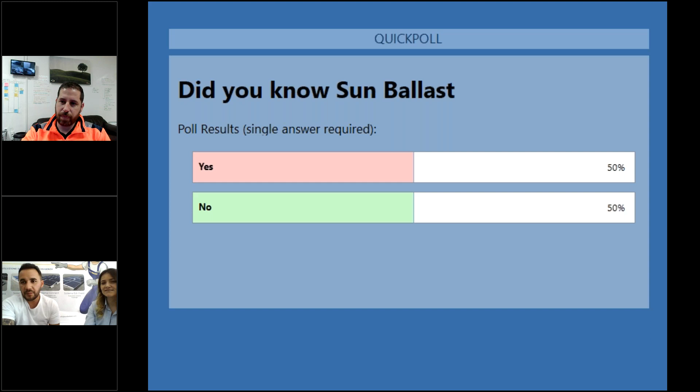That will be our second question, which we would like to share with you as well. What does your company deal with? Installation, design, engineering, distribution, EPC, or other?

Great. So now it's time to start with the presentation that we have done for you guys. For those of you who haven't seen a webinar from Ballast before, me and Alona, we've done several with a lot of distributors from all around Europe. And the same we'll do with Mr. Spiros here, which is a short presentation of our company. What do we do? What is our mission? Our vision, and then Mr. Spiros will say a few words as well regarding his company, and then we'll talk regarding our distribution part, right? So how it's been affected all these years.

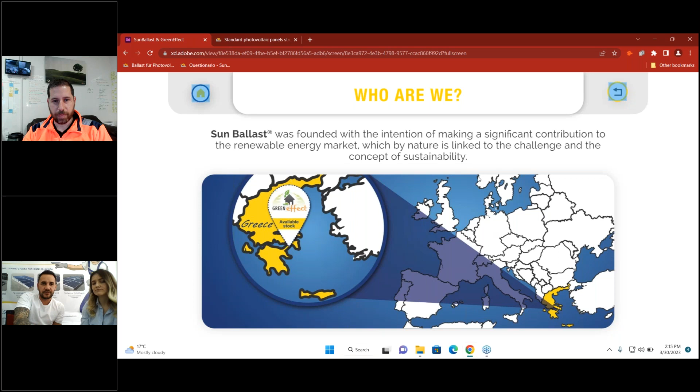Yeah, before we start on that, I'd like to ask a question to the candidates. So, what is the problem that they usually face during the design or installation of a system? There might be common problems, right? So some of them we gathered together, and we're gonna show it to you guys. If there is any other obstacle, any other issue that you had during the installation phase, you can write it in the chat and we will answer.

So, it's obstacles on the roof, small spaces, limited spaces, bad orientation of the building, high wind presence, and load limits on the roof. Yep. Some of them. So if there are others that we didn't mention, feel free to write them in the chat and we will answer you.

All right. It is weird because for a country like Greece, we had this option of high wind presence, right? So far nobody is mentioning it, and we've seen that a lot of installations that have been done in Greece are in areas which are very affected by wind. And Spiros, you can confirm that some areas are very heavy with winds, right? Yes. We have to wait to see what the guys will vote, I guess.

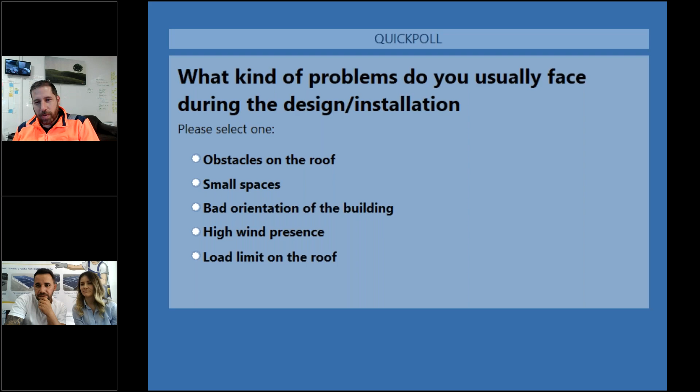Correct. But all these are issues for Greece. We have flat roofs. We don't have tile roofs. Our spaces are small. Most of the houses are one next to another in a very condensed area. There's no space, exactly. The orientation of the buildings is not correct. Of course, here in Greece, there is a lack of proper planning in the municipalities where people build the houses.

So there's no exact south. It's really rare to find a house or a rooftop that is facing directly south. Yeah. Wind in the majority of Greece is an issue, especially on islands, especially on the coastline. And that's where you guys and us go in to identify the areas that need attention with extra ballasts, with specialized engineers, and there's also a program that helps us calculate the ballasts for the roof in high wind pressure.

Correct. So these were the results that we had from the answers from the attendees. So 50% is small spaces, which is something very good actually with the material that Spiros has in his warehouse. I know that he already has one of our systems which is used for small spaces, right? So you know the problems that they face mostly. We can direct the presentation of the solution in that sense as well. Correct. So I think we're good to go.

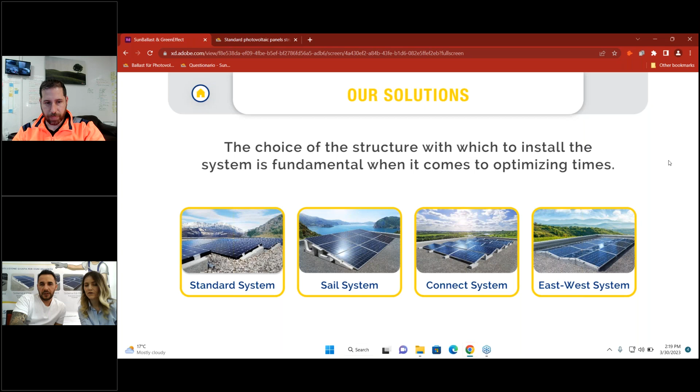To our solutions, and we can see all of them by advantages and the problems that they address. Correct. So SunBallast is divided into 4 systems, right? We have 4 main systems that we produce in several production sites in Italy. These are our standard system, our sail system, connect system, and East-West system. I'll start with the problem of small spaces, being the biggest issue in Greece. So let's go to the sail system.

So 50% of the attendees chose small space, and that is one of the issues that you might find in residential projects, right? In small houses, when they have an area like a garage or a really tiny area next to the house. So for that we have a solution, which is our sail system. Yes, sure. And we will see why that system is chosen by our customers, right?

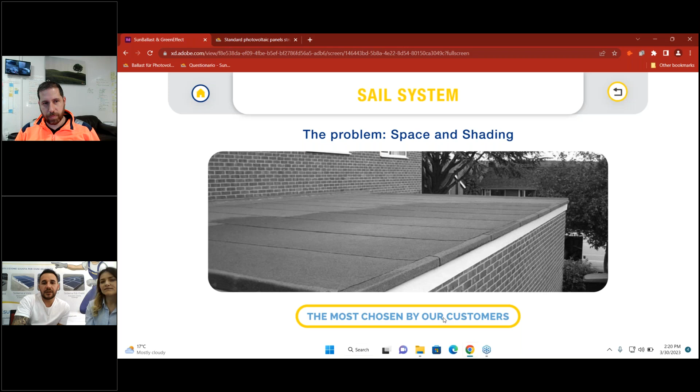In my experience in Ballast, I've seen not just small spaces, but cases when even the parapet is too high. Correct. So the surrounding wall on the roof is so high that you have to avoid shading. This system solves that issue as well. So both problems are solved by this system. That's why Spiros chose this system, being the problem that they face mostly.

So we have 2 solutions for this system. Right, 2 inclinations: 5 degree and 11 degree. 5 degree goes up to 6 rows and 11 degree goes up to 3 rows. Correct. As you can see on the screen, we have below 2 videos of installation that show how the installation is done with the system. Pretty much it's very simple, right? As we mentioned at the beginning, it's only a few steps to install this. So if you like, you could watch.

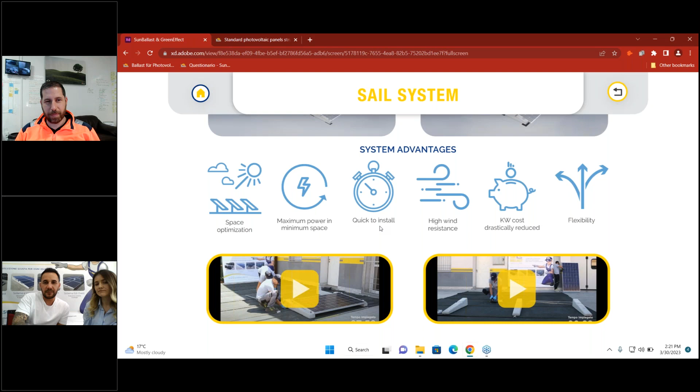Of course, these videos you can find on our website. You can find them through our social channels as well, and you could see them after the webinar. We don't want to take your time to show the videos again, but pretty much it's simple. So we'll talk a bit more about the advantages of this system.

As Ilona mentioned, they come available with 2 inclinations, 11 degrees and 5 degrees, right? What are the advantages of this system? Space optimization, right? Which is something that clients ask for most. They say, I have this small space, but I want a lot of production. Perfect. How can you do it in this case? You have to use this system because it's the only way that you can put the modules without leaving space in between. Correct. And with small space, you put more power on it. So maximum power and minimum space.

As we discussed, this system is very quick and very easy to install, right? Just a few steps to finish your installation. High wind resistance, of course: they are ballasted, they are concrete, so they have their own weight. And here I have to mention that not all the ballasts have the same weight. Each inclination has a different weight. We start from 16 kilograms, our lightest ballast, and we go up to 70 kilograms, our heaviest ballast. So they come in 40 types of ballast, different shapes, different systems, and you can choose according to your inclination the one you want to use.

And of course, they have high wind resistance, as you mentioned, and the kilowatt cost is drastically reduced. Of course, that will make a big impact for the client. Everyone will check the economical side, right? So whenever you want to install 20 kilowatts, and you can do that with the sail system with less ballast, why not? Yeah. Of course, and the flexibility.

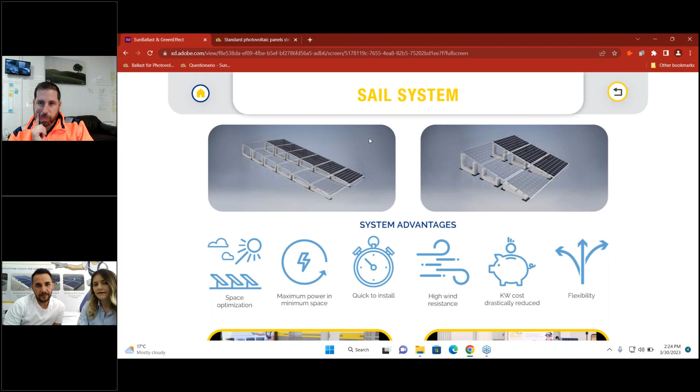Yeah, and I wanted to share something for all those that come for the first time to our website: for each system, you can find the technical data sheet. Correct. For example, here, I want to find 5 degree sail. So here, on the page of the system, or the ballast itself, you can find the technical data sheet. Just download it, one click. All right. We will open it here. So we can see all the dimensions, the width, everything. How it can be installed in horizontal, vertical. It's everything present there.

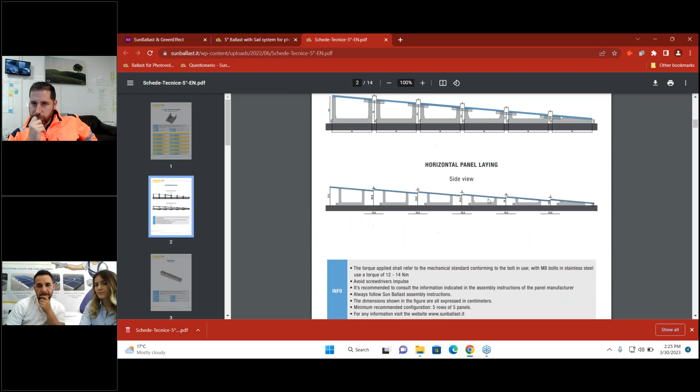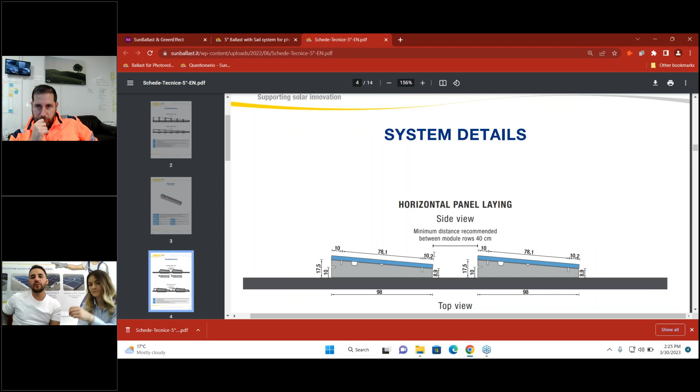Even the distance from module to module, of course, you can do that. It will show you the distance that is required from module to module in order to avoid the shading problem, right? So this system is good to use as a whole one, as Sails, and you can use it as a standard one, single rows, as well. Yeah, that's regarding this.

One question for you: how did you find it when you did an installation with the Sail system for the first time? When we first installed, I think it was like a year and a half or 2 years ago, I don't remember. Initially, you open the boxes and you're like, okay, what are we going to find here? What's the story? But believe me, it's way easier than you even imagine. All the importance lies in the design, in the initial calculation, and the installation, especially for small projects, let's say 5 to 10 kilowatt peak, is really easy. It's basic mathematical calculations. You can finish the installation in a couple of hours. Correct.

This is one of the questions that always comes from somebody who is new, right? Who never installed ballast before, and he's like, okay, this is going to be difficult, even though he might be an engineer or a good installer. At first impact, he thinks he will probably have some difficulties. But when they have it in front of them and try to use it, okay, this is a piece of cake. I can do that very easily, right? So I guess that was your feeling as well when you saw it for the first time, with the Sails system, but with all our structures.

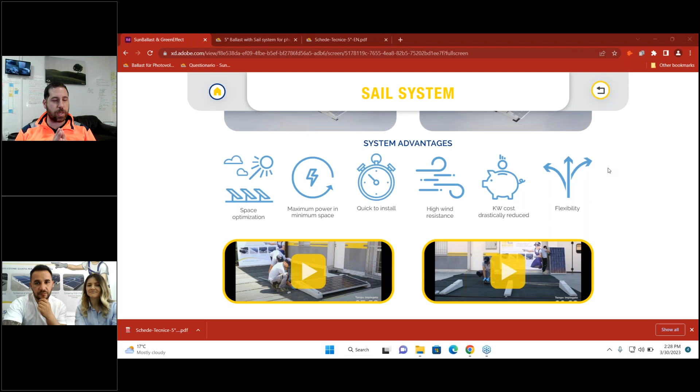Yes, exactly. The more you interact with the system, the more you start to innovate as well. The solutions come to your mind. So during the feasibility study, maybe the first, the second, the third, initially anybody will find it difficult. But after a few installations, whenever you see a flat roof, you will easily realize what needs to be done there, what different ballast can be used.

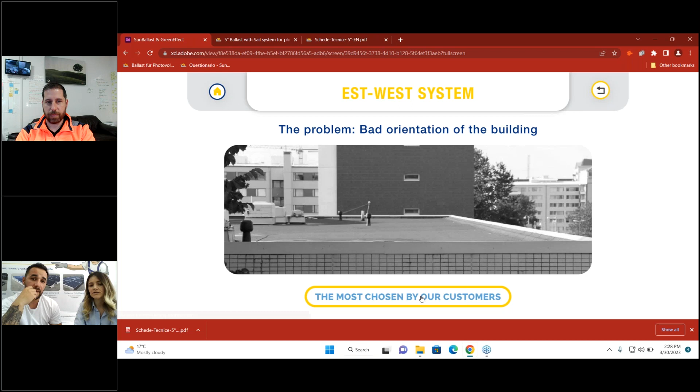Correct, correct. All right, Ilona, I think we should start with the second solution that we have. As we said, there was even a bad arrangement of the building, bad orientation of the building. For that, we have a solution as well. So the solution for our clients is our east-west system, to make production during all the day. Very common system. You can use it with a lot of different structures as well. We've seen it with our ballast east-west system or east-west orientation.

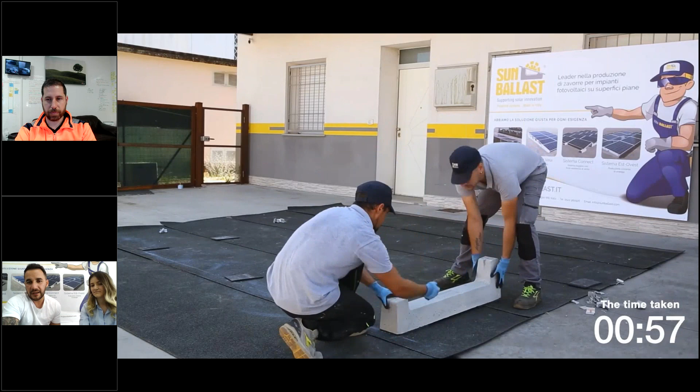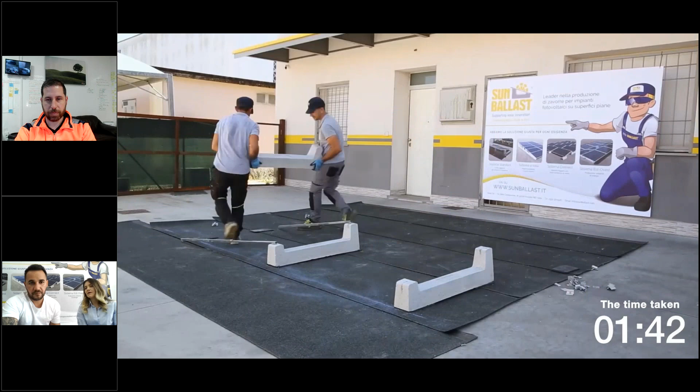It's simple. All you need to do is to have two ballasts, right? So the two ballasts fit back to back to each other. So with that, Ilona, let's open now. We would see the installers doing a quick and small installation with east-west. So it's practically our standard system, but the ballasts are back to back. So it's very, very easy. As you see in the picture, they just position the sheet under the ballast.

And the tool there, Errol, can you explain that? Yes. So there is an alignment tool which in Italy we call DIMA. The alignment tool will allow you to measure the distance according to the panel you have. If you have a panel 190, then you can arrange the measuring tool at 190 like this. You can align all the ballasts in the same way. Like this, you'll gain time, so it will make it easier for you to do the installation.

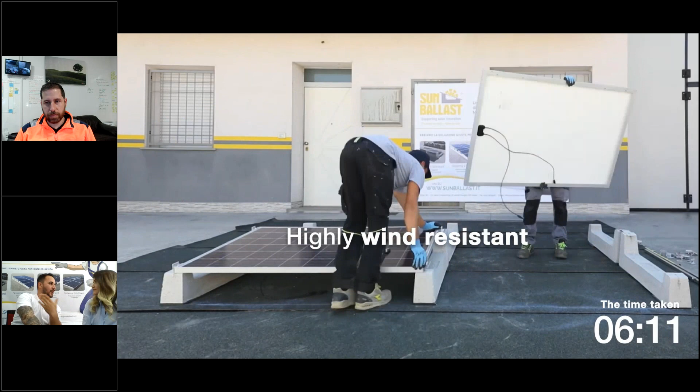So as you see, there are two ballasts back to back to each other. And there are some junction plates added here in order to increase the resistance of the system. As you can see, the installers already did it. It's a junction plate which we provide. We have it in stock. Speedus as well has it in his stock, I'm 100% sure because I was the one to send it to him. It's not always required, depending on the inclination that you have. If you're using 10 degrees, for example, you don't need the junction plate at all because it's already 60 kilograms of ballast, so it's heavy.

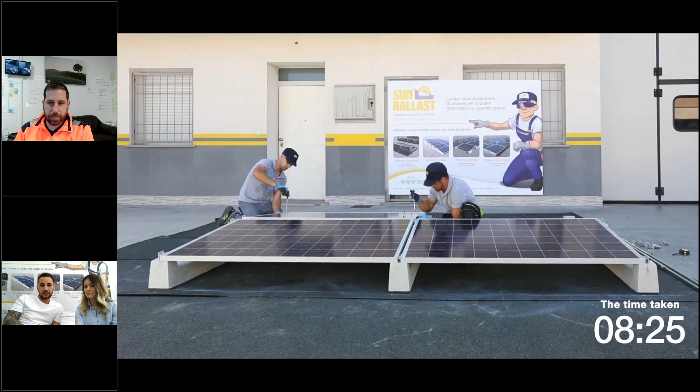So we see that the installers almost finished. They're doing 4 panels. So you can see that it will require 6 ballasts to install 4 panels in east-west orientation. And they just use the clamps, central and terminal clamps, to fix the panels. Correct. Even those we can provide to you, or if you have your own clamps, or you're a producer of clamps, or you can find them somewhere else. As long as they are compatible with our ballast, you could use them.

Sure. It's something to be mentioned that the ballast itself already has threads inside. So it's already prefabricated. How do you say that? Prefabricated, right? Sorry about that. That was something. All right.

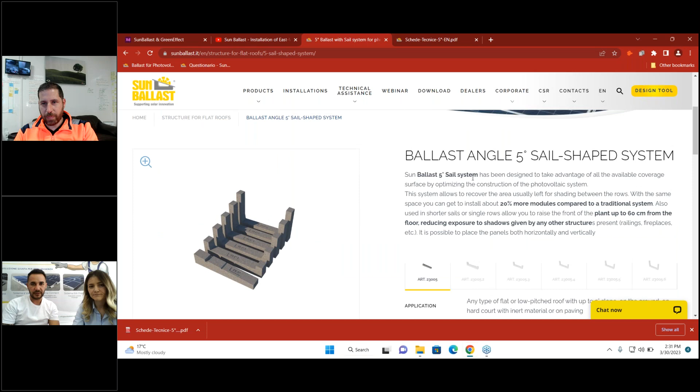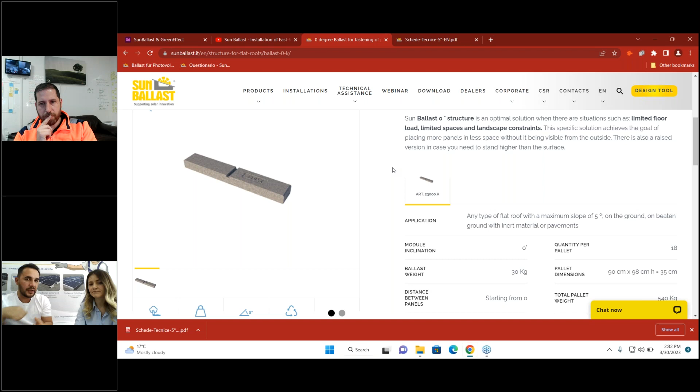The ballast has the threads inside. It's an M8 bushing, and when we produce the ballast, it comes with it. Ilona will probably try to find a picture where you can see it clearly. It's fine, in our technical data you could find everything. Just an 8 mm Allen screw. The M8, correct, so it's 8 millimeters, inserted inside. So you don't need to drill, you don't need to do anything. You can use only the hand drill or anything to clamp it.

Yes, exactly. I guess here we can see it better. The thread is already inside, so you just have to fix the clamp. Correct, so it's pre-prepared. And there are even 2 fixing points, and one is in the back. Correct. So, for example, for accessories like cabling that we will explain later, additional accessories to reinforce the system, you already have a thread on the back of the ballast as well.

Not all the ballasts have it actually. Some of them do, and it's used to reinforce the system. Before, we used to use additional bars; the bars were the reinforcement system. Now we have a new accessory which we're going to share with you guys.

So before jumping to the other system, I would like to recap once again the advantages of the east-west system that we have. Space optimization, of course: you don't need a lot of space because all the modules will be next to each other, attached. It's not required to leave a lot of space between them.

It's just a few millimeters, like the distance from panel to panel, right? High wind resistance: this system is proven to be very, very highly wind resistant according to the tests that we have done. The need of accessory? Correct, without adding any additional accessory or any additional weight to the system. As you can see from the shape itself, the east-west orientation does not require a reinforcement, right?

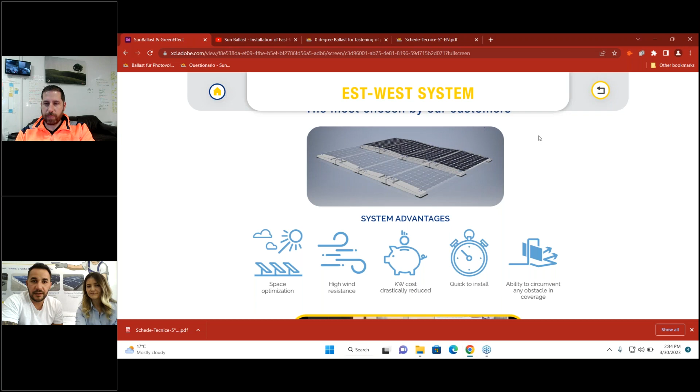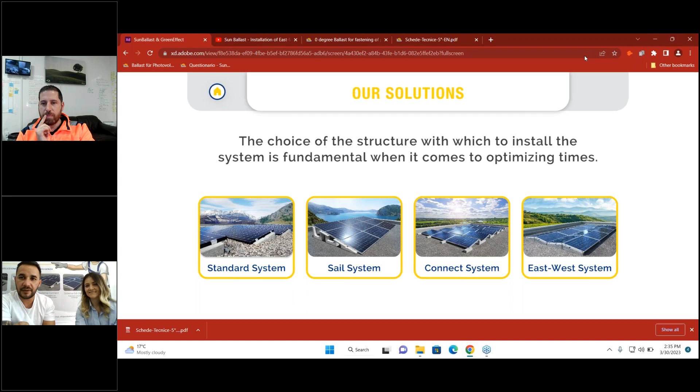Yes, correct. The system to use in this case is our standard system, and it's available from 0 to 35 degrees. It's very highly wind resistant, as all our systems are. It's very quick to install. It's flexible, as I already mentioned, and it has the ability to circumvent all the obstacles on the roof. Correct. So as Ilona mentioned, from 0 to 35 degrees it has several types of inclination, and with all those inclinations you can use your standard panels in horizontal and in vertical position, right?

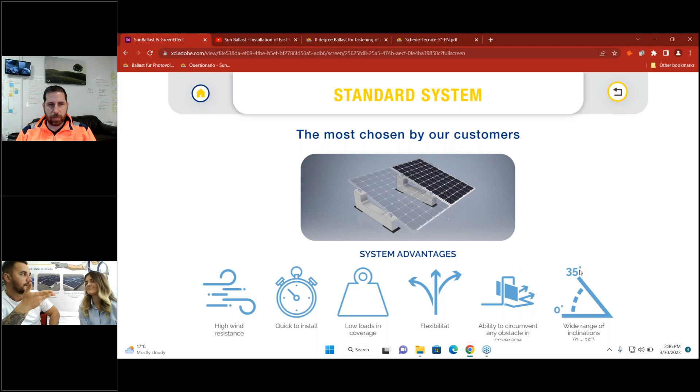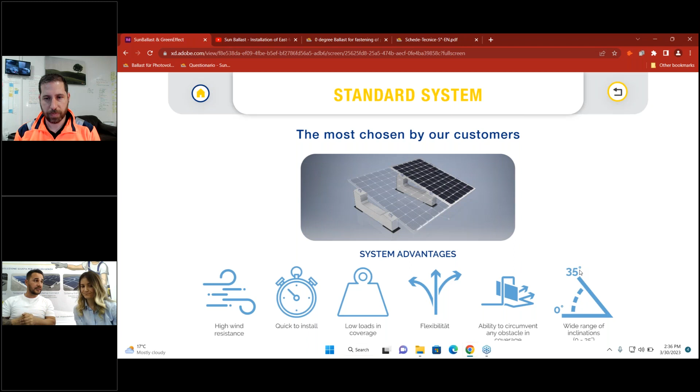Over time, we have seen that the manufacturers are producing bigger and bigger panels. The dimensions of the panels are getting very big, and some of them were not compatible with our structure. We saw it at the beginning of last year. That was the boom when the large panels entered, and a lot of our clients used to share with us the technical data of the module, and when we saw the dimensions, we could not do it in a vertical position, because they would ask for vertical and we could not. So we came up with another solution from the standard system, which is our 10-degree ballast.

The 10-degree ballast will allow you the vertical installation of 2-meter modules. But that doesn't mean that your module must be 2 meters; it could be 2.2, 2.3, right? It could go up from 1.9. Correct. Above 1.9, we could use the 10L, which we call 10L because L stands for large, in vertical position. And in horizontal position, we could use all our standard ballasts.

This type of ballast has already been researched and tested, and our engineers in the company have already checked with the panel manufacturers whether the ballast is compatible with these modules. I say this because some panels have different clamping points. Some can be clamped only from the short side, some have two clamping points on each short side of the module. So depending on the typology of the panel, you can find out how to install it with our ballast. We've done that check with a lot of panel manufacturers, and they say this ballast is very compatible.

And this year our research and development team has come up with a solution even for horizontal laying of the panels. Correct. Because the trend is always larger, larger, larger. So we had to come up with a solution even for the horizontal laying of the panels. Correct. We presented it this year, and it's called No Flex.

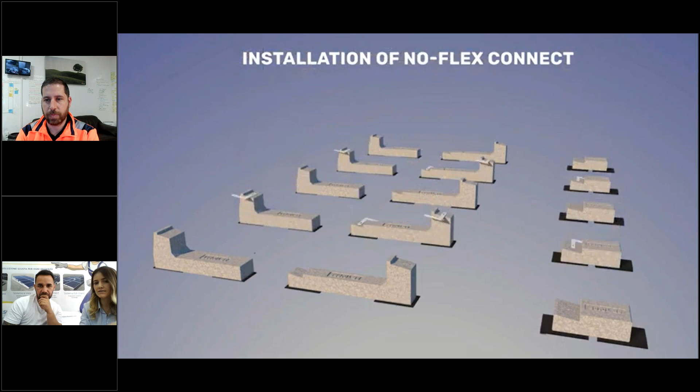So with No Flex, this is possible, because this accessory allows you to add a central ballast in the middle of the panel, right? So which is good. It's only two junction plates that are used. I don't know if I can show it. Yeah, this is a small video demonstration. This is for the Connect system. So as you see in the video, it just adds a central ballast. These are the plates for the Connect system.

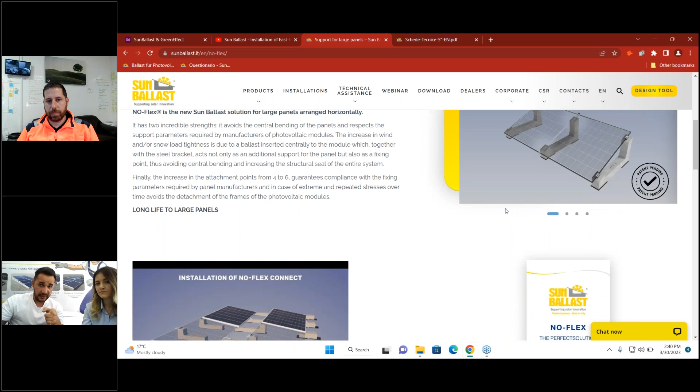You can add plates. Correct. And it's very, very easy to install. The same goes for the standard system. Just the junction plate is an I shape. I think in that video your standard one will show up. So here is the standard system, the central ballast, and the I-shape No Flex. Correct. So it's just two junction plates, very easy. And you can install them with the terminal clamps that we provide you.

And like this, you will of course increase the resistance of the panel, right? So these are the advantages that No Flex gives us. They meet the support parameters required by the panel manufacturers and avoid using additional weight. So if before you used an additional weight to reinforce the system, you already have a central one in the middle, so you don't need to use it anymore. The system will be resistant enough. It avoids the central bending of the panel and, of course, increases the resistance to wind and snow load. So both of them, right?

In Greece, I think that we have a lot of heavy snow loads? No, I don't see that, but heavy wind loads, of course, we do have. So this accessory could be useful. And it improves the structural strength of the panel, right? Having more points makes it stronger. So before we had 4, now we're going to have 2 extra, so it will be 6 fixing points, right? So this is our solution for large modules.

And Spilios, you already have this, right? If I'm not mistaken, we've been sharing with you the No Flex accessory as well. We have made a couple of installations with long panels, and one of them was just before your solution came out. So there are complex cases that this solution really solves. But there are also hybrid solutions between your products and some ballast products that we can use.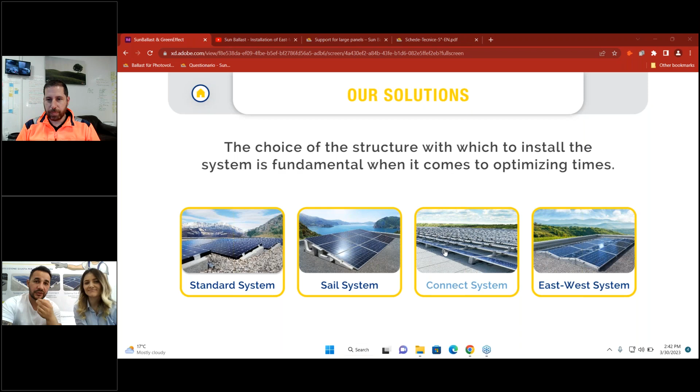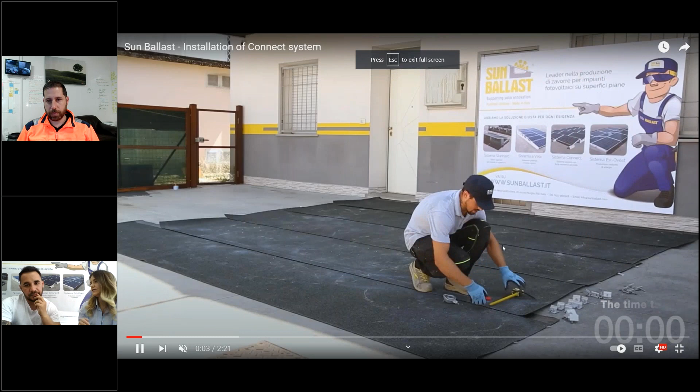All right, so I guess we are going to the last system we have, which is our Connect system, which we saw in the video before when we used the No-Flex with it. So the Connect system, why do our customers choose it, Ilona? Because it's very resistant. It's composed of 3 parts: the frontal, the central, and the terminal part of the ballast, and it comes as a system. So if we said before that the other system can be used separately, this one can't, it has to be all together. So it's very wind resistant, because we have an expression that says when you're united, you are more.

Of course. So that's the system itself. So as you can see, the installation is very, very easy. Parts are lighter. As you see, they are smaller. So even the load on the roof of the building is much less. One feature that this system has as well is the loads on the roof, right?

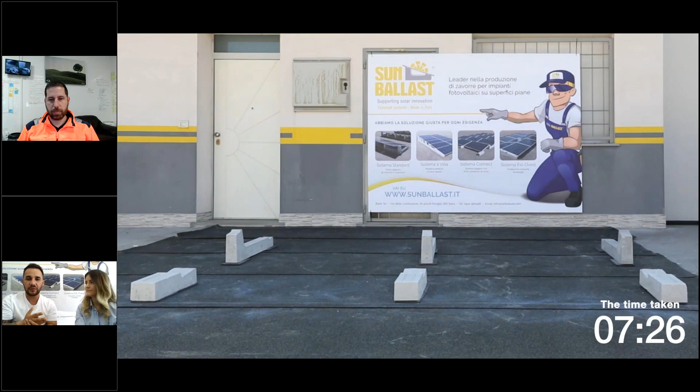So you're always worried whenever you get some loads or you get a concrete structure because of the weight on the roof. Oh, can it hold it? Can it not? I need to check with my engineer or not. So with this system, the maximum loads go 15 to 25 kg per square meter. So including the module, right?

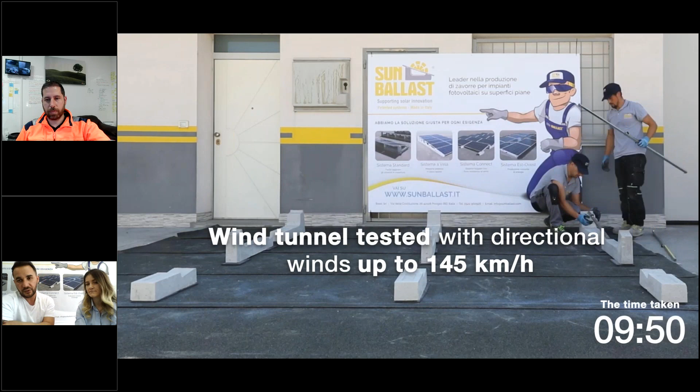So that means ballast plus module plus accessories as well will go 15 to 25 according to the inclination that you guys choose, and of course according to the area where you're doing the installation. If it's a very windy area, it might require that we add some additional accessories, right? So additional weight to make the system more resistant, and that will increase the load on the roof.

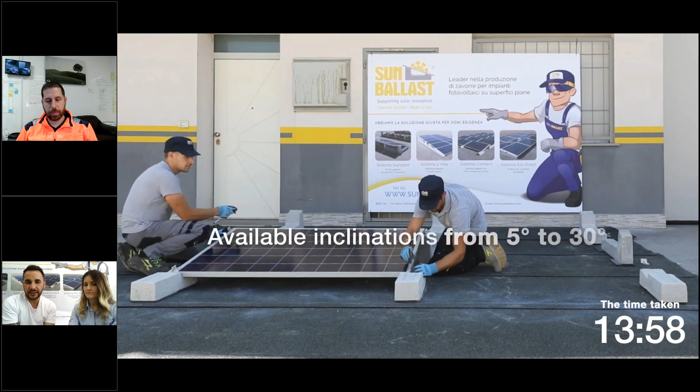But in our technical report, which we're going to speak about after this one, we're going to explain to you whenever you get a project with us, what you're going to receive, right? So we see the installers here doing the installation. It's available from 5 degrees to 30 degrees, right? So we have 5 degrees, we have 10, 15, 20, and 30 degrees. These are the inclinations available with the Connect system. Horizontal lane? Horizontal lane, we have only 10 degrees. Only 10 degrees. Correct. Yeah.

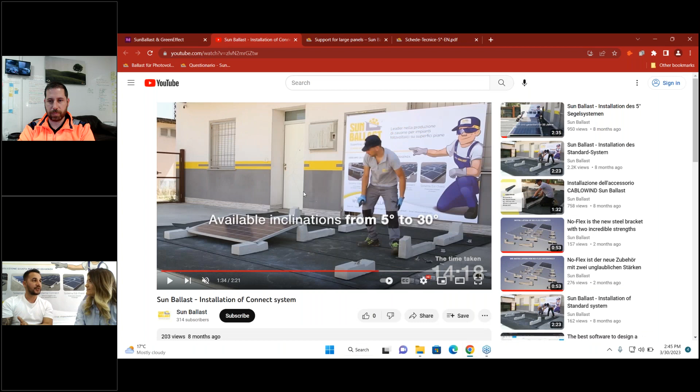And we've also done a mix between 2 systems. Actually, I don't know if you know this or probably you've seen it. We've done a mix of our system. It's called Connect Sail system, right? So there are 2 types. It will allow you to connect 2 panels in the Connect system, right? So it's very beautiful. You can check it now. Ilona will show you the technical data sheet of it.

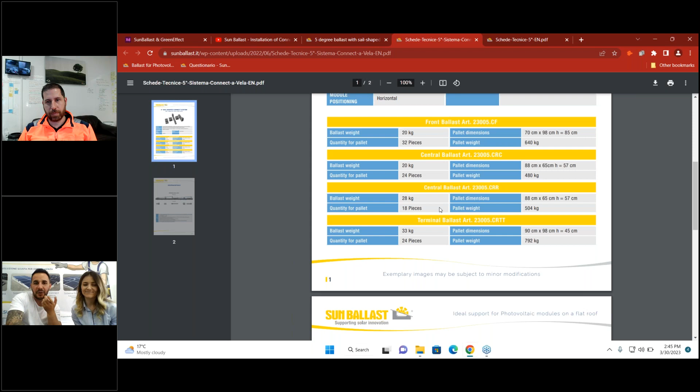As you can see, with Connect, if you have like 3 bars in here, you'll have another one, right? Yeah, correct. Another central one in order for you to connect 2 panels next to each other, right? So it's a Connect system, of course, with a sail shape, right? So you have 2 panels, and this is very nice. I mean, we've done several installations with not a lot of people that know it, because they don't go to all systems, right? And I don't blame you guys, but it is very nice to use it.

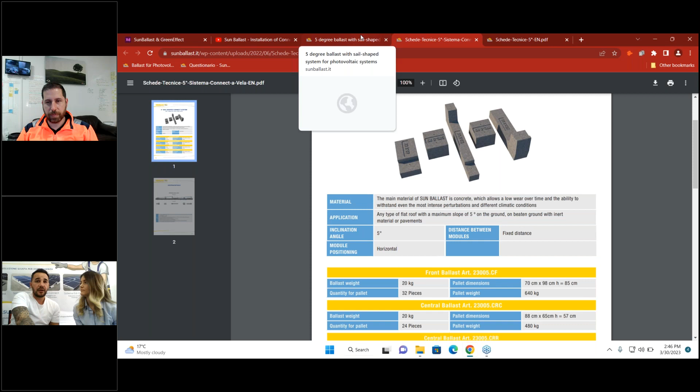And we've done actually one installation of 65 or 68 kilowatts. It's done within the day, right? With this type of system. So very good, very easy to install. I would suggest it, right, for different areas on the roof. This comes only with 5 degrees? Correct. Only 5 degrees available. We cannot do it with all inclinations as well. We already have a lot, right?

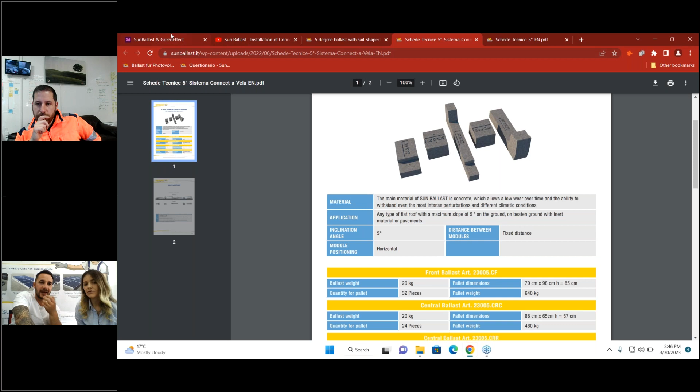So yes, this is all about our Connect system. As we said, very high wind resistance, it's all linked, connected together. Low loads on coverage, 15 to 25 kg per square meter. Kilowatt cost drastically reduced. Since it has of course a low load on the roof, the ballast is already light. The transport cost is lower since it's lighter.

Of course, that's if we were sending from Italy, but we're not here for that, right? We are here because Spiros already has the material. So the transport here is already cut. So we don't need to. You save the transport because you have the material already, and it comes with several types of inclination, right? So these are all the systems that we have in our range of products.

Correct. So as we mentioned before, Spiros, would you like to share something with us? If you like, I could make you the presenter, so you could. Have you prepared the pictures or something? Yes, of course. If you want, I can show you. Of course, we would love to see that. Here you are. Opa. Now you have the screen. Yes, Opa.

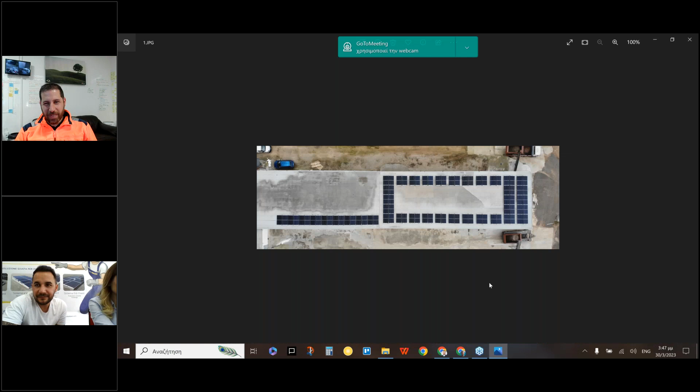So this is a project with east-west. This specific building has issues with weight, and we distributed the weight. You see around the center. You'll see in the picture that the center is 11 degrees east-west, but with the second ballast, the second row. So we're a little bit higher from the floor because the floor holds a lot of water. We don't want to be next to the water. So this is an east-west solution with a higher ballast.

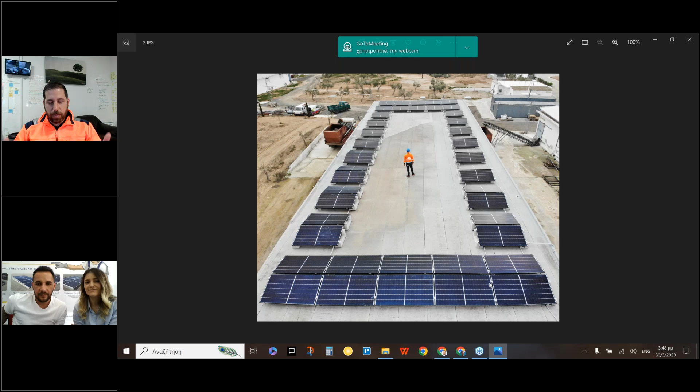And amazing for the water penetration, right? So it can go through it, right? So yes, in the center there's a lot of water during the rainy season. So we are going around for the weight, for safety reasons, and we don't drill also. You don't want to drill here and get an aluminum structure or a steel structure, because all this area is full of water, everything here. So this is the best solution for this case.

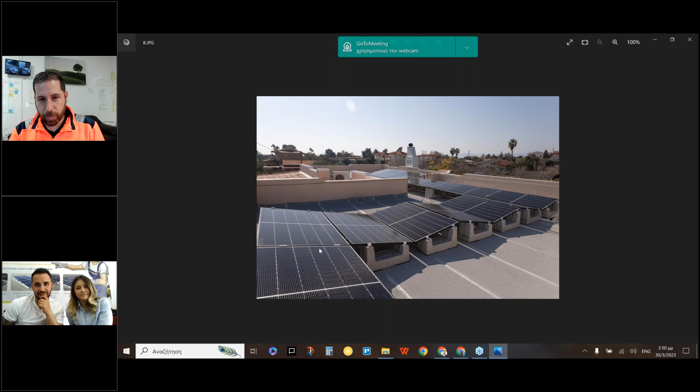Here is another. This is a very nice installation that we have east-west to avoid the parapets, to maximize the space. And now we are also upgrading the system. This is an 11 kilowatt peak system. We are upgrading it to 17. So all the space you see around empty will fill with panels. With this solution, you cover the maximum of the roof with panels. You have inclinations east-west. So whenever the shade is on the west, the panel is directed to the east, and so you have maximized the production.

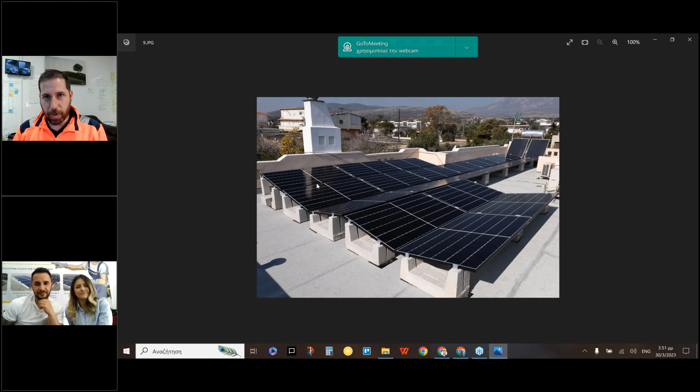Look at another picture. This is a brilliant solution. This is also again the 11.2. You can do the same with the 5 degrees ballast, with the highest ballast, the 6th in the row, 5th in the row. You can make many combinations. And this is the ballast. If you see here, there's double ballast, extra weight. You have a feasibility study that you follow, so the system is completely secure. No drilling, maximize the space, completely secure with wind loads. Even if the panels were long panels, they wouldn't suffer with the wind.

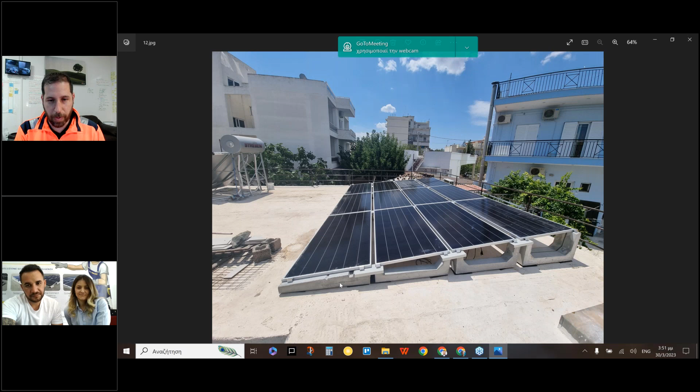So in this case, we have to contact a specialized professional whose job is to level grounds. For small installations it is extremely easy, 5 kilowatt peak, 10 kilowatt peak. For bigger installations, in order to get a good outcome, because as you can guess, it can be like 40, 50 meters length.

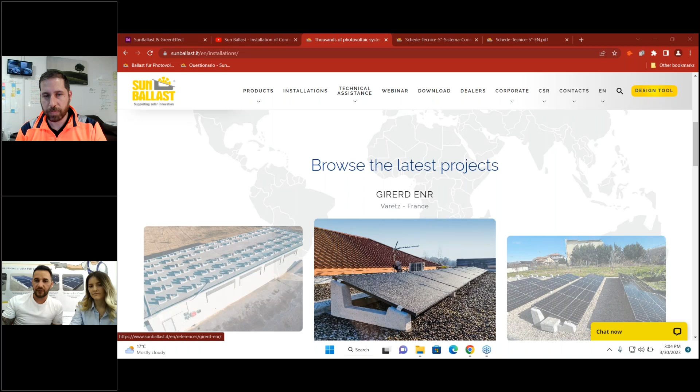So what we can say to you: from 0 to 5 degrees, you can install our structures without any problem, right? So up to a 5-degree slope, you can install. We will always recommend low inclination. You can go for a 20-degree ballast on a 5-degree roof slope if you want that, but we will always suggest you use low inclination, starting with 0 degrees or 3 degrees, or maximum 5 degrees.

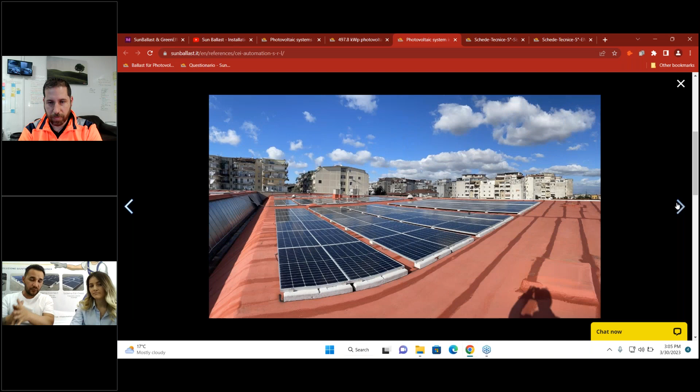These are some references from clients; we've done several installations at 0 degrees on roofs that have slopes, with this type and different typologies as well. So from 0 to 5, you can install our ballast without any issue. Usually, I would recommend going for low inclination, 0 to 5 degrees for the ballast.

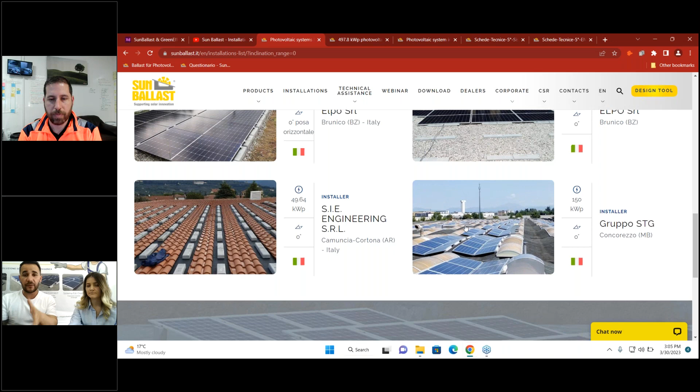Then, if we have a roof with a slope from 5 degrees up to 10 degrees, it's possible with our ballast, of course with low inclination as well, but there is a type of foam that we use so the system does not slip. It's a foam that we can provide to you, but you can also find it in hardware stores in your area. It's a very simple foam that you glue under the ballast and it makes the system resistant, so you don't have to worry about the ballast slipping.

So from 0 to 5 without foam, and from 5 to 10 with the help of the foam that we provide. This is the foam we provide if you want to get it, or you can get this type of foam anywhere in your area. Anyway, we always have to check with our technical department before doing that. We cannot just say, use the foam and it's done. We're going to check the typology of the roof. Some types of roof are not compatible with this foam; it will have no effect at all.

Just today, I had an email from a guy who was planning to use it on a 7-degree slope. He knew about the foam we have, and he said he has an EPDM type of roof. With this typology of roof, we cannot install it. If it's TPO or a different type of membrane, we can apply the glue on it. But with EPDM, unfortunately, you cannot glue the ballast.

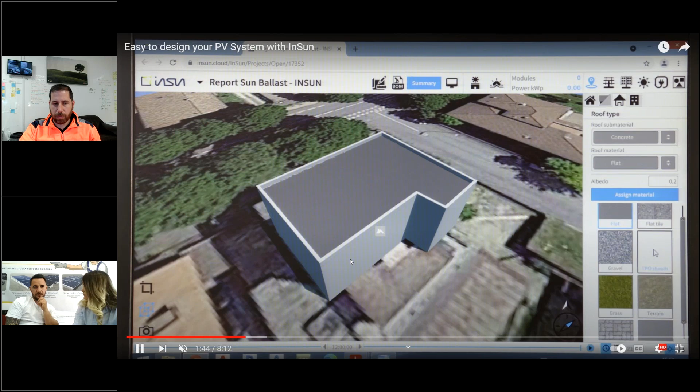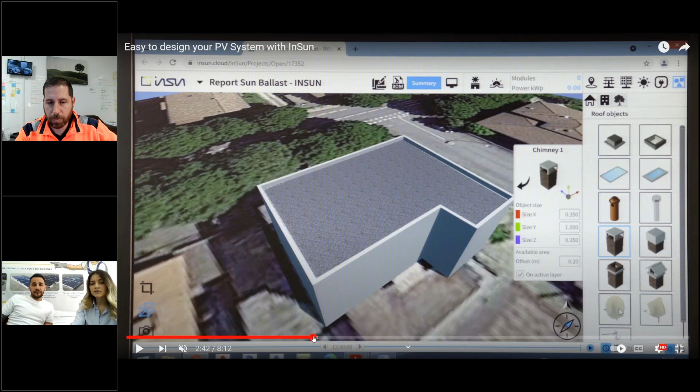You can even choose the type of roof, whether it's gravel or a green roof. All the details that we ask for, you can use through InSun: the typology of the roof, the inclination, the height of the building, the parapet. You can add or remove obstacles like here. Pretty simple. You can even add trees if they are creating shadows, or buildings or anything. It's a very useful software.

If you want to do it fast and generate the system on your own, including the bill of materials, you can do the system yourself and then share it with the technical department for verification. Correct. You just click share, it's an option there, and it comes automatically to our technicians, who will verify it for you. So there will be a double check from our side to see if the system is okay, if it's required to add or remove weight, depending on how you've done the installation, or if you're doing it for the first time.

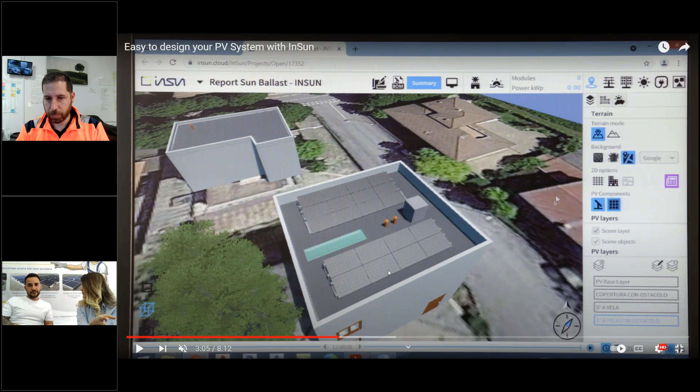Yeah. And once you have created the prototype, chosen the structure and the model you are going to use, you just insert it on the roof. Then you can even calculate the production, according to the timing, right? It's a very useful tool.

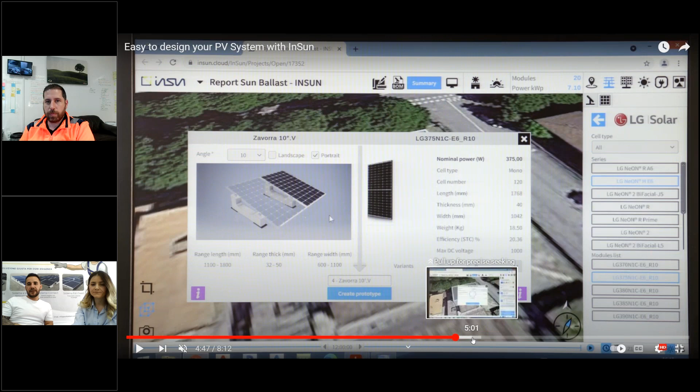Here we see that we can choose the panels, we can choose the Sun Ballast structures, the system. Yeah, here, after Afaz has created the prototype, he's adding all the... Correct. You can just duplicate them. Yeah. You can just duplicate and copy, and you can insert rows, you can insert columns. It's very simple, right? According to the roof you have, right?

You can use the standard system our technicians are using now, or you could use different types of scale as before, yeah. You can even remove modules if there is any obstacle on the roof. Like we said, the flexibility is one of the features of it. It's very, very easy. So once you have done 2 to 3 projects with it...

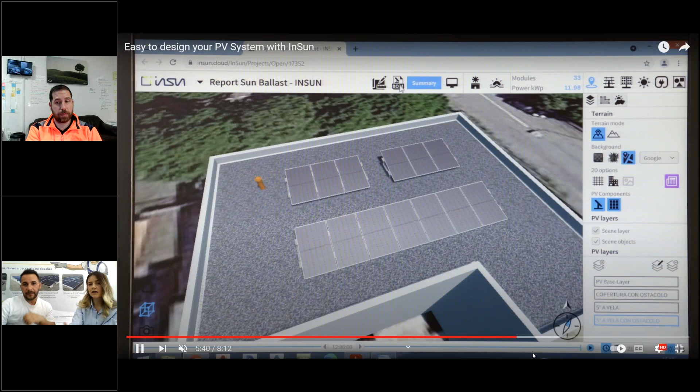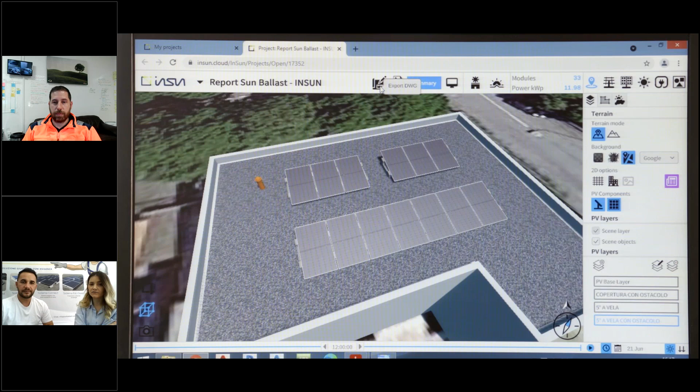For example, he is doing the bill of material. Let's see. And there you have all the lists of the material that you need, all the components. Correct. Like the plans and the sheets, which are all that you need, a simple DWG file of the project. So this is regarding InSun. Of course, it's very useful.

I have to mention that here is going to be the technical report that you're going to receive after you finish the installation with InSun, right? So it's going to have all the details that you mentioned. It's going to be the BOM. So all the details, the bill of materials. Can you play?

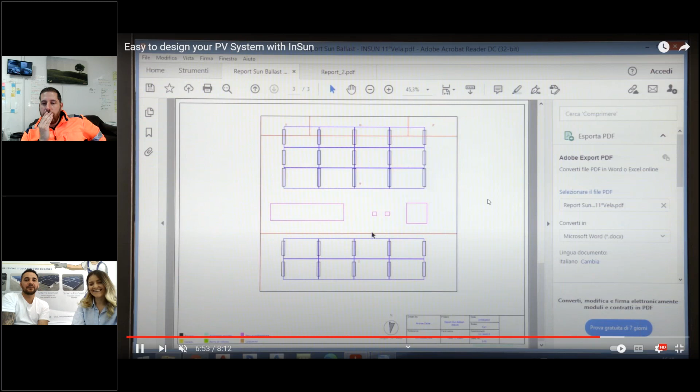We need the layout, right? So the layout pops up in the technical report, with all the rows, according to what you already have inserted. Then there will be a double check from our technician to verify if it's correct or not. If not, we'll let you know that the system needs to improve, needs to add some more ballast, additional weight. They will do the arrangements and they will send it to you. Correct.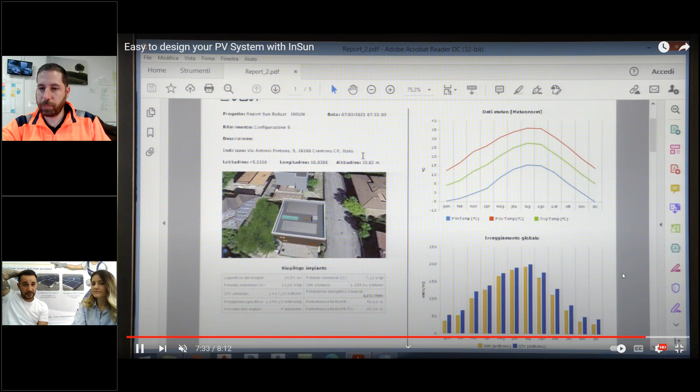Inside it is included even the electrical part. Correct. You could also talk about the electrical part, like adding the inverters, the optimizers; all of this is accessible through InSun as well. So it's a complete system from A to Z, right? So all you need to do is just go on the roof or give it to the installer, and he'll finish the job. Yeah. So this is all about InSun.

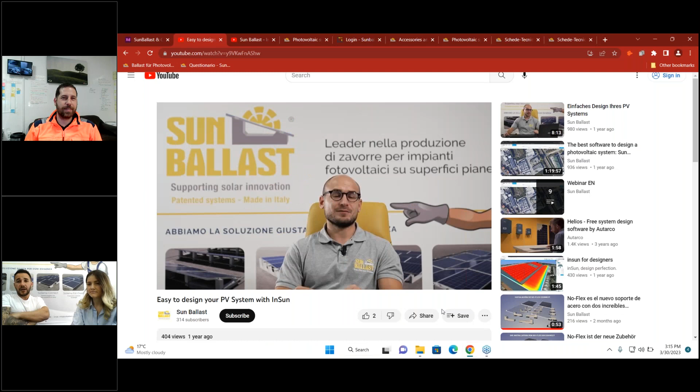The last thing that I'd like to mention is that soon it will be available as well in an app on the mobile phone, right? So it will be accessible on your phone, on your tablet. If you're on the roof with a client, you could do the installation while you're talking to him. In this case, I'm talking to Alona, I could do the whole installation through my tablet or my mobile phone, and I could show him a simple layout directly. So that will be available soon, and we will let you know, guys, whenever it launches.

Sure, you can see tutorials on some platforms on the day that you start to use it. As Silvia said before, even our ballast is difficult to install when you see it the first time. It's the same thing with InSun, but you do it day by day and you get perfect at it. Correct. So it's very easy.

We've even done several meetings with some of our distributors, where the technician was showing them live how to use it. So that will be even easier for you. Yeah, we can fix a meeting with them and they can see it. And on our website, we even have a chat option. So anytime they have any questions, we will answer in a couple of seconds. So it's the easiest way.

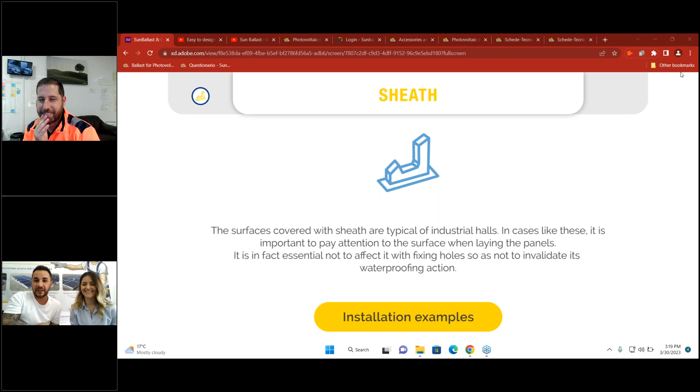So this is a 100% recyclable rubber mat that we have, where you can use it. Very strong, very resistant to sun. Yeah, it lasts very, very long. It doesn't have a warranty as the ballast. The ballast has 25 years warranty. This one, I don't know. I think you know how much it is. But I know it's very strong, right? So it's very good and we're using it for all the sails and everywhere in Europe, right? So it's compatible with this type of roof, the sun ballast.

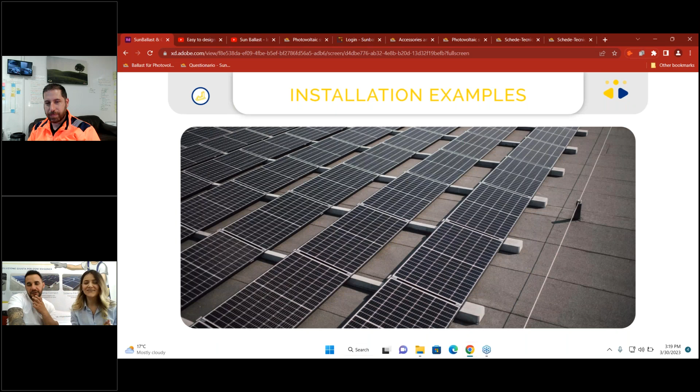Here we can see the installation. Usually recommended in these cases is the open system because it's lighter, as we said, and it's even for big industrial. All right, industrial, yeah. So you can use this system. But anyway, our systems are very flexible, so you can play with them and use them in every kind of system.

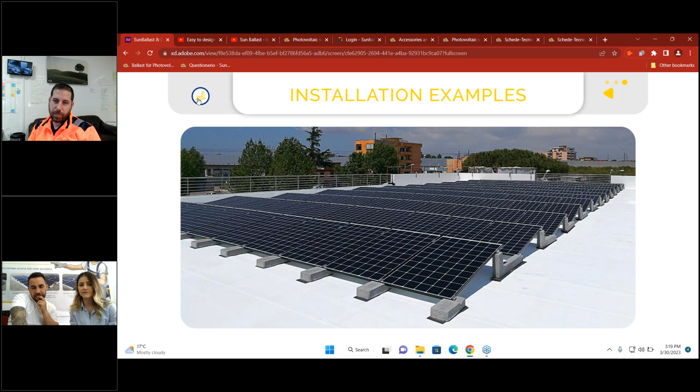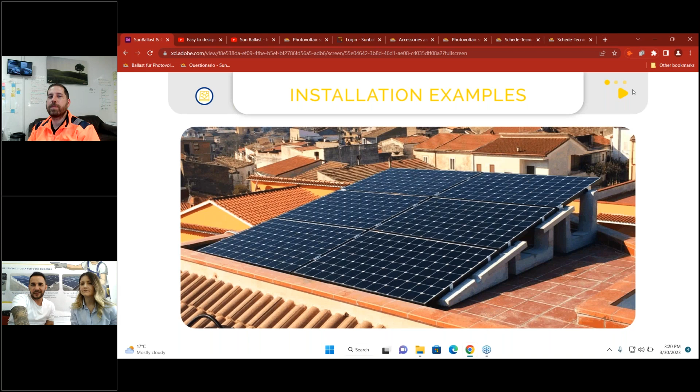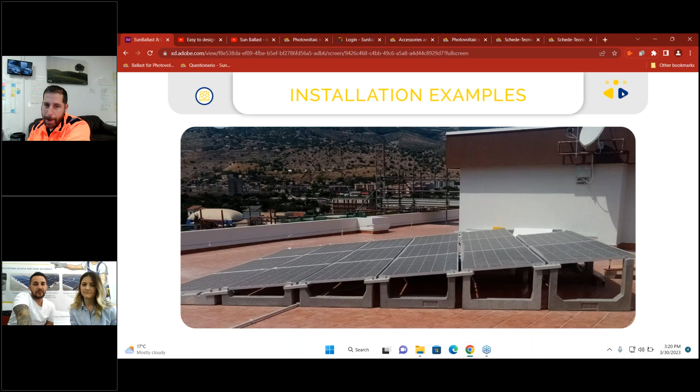Correct. The other typology of the roof that could be is flooring, right? With tiles, several tiles that we use. Mainly those tiles are used for residential houses or other areas. Of course, we will definitely go with a sail system. You can implement the ballast directly even in here, as even Philips had some references with it. You can just directly implement the ballast on the surface. Here we see several types of installation with the sail system.

Another typology will be gravel, as we saw that as well, right? Gravel roofs usually are very common in some areas. I don't know about Greece, but in some areas they are very, very common, and they are used mainly to protect the roof from UV light and all this. So you could easily implement our ballast in that case. You can. It depends on the type of gravel that you're going to put on the roof. You can remove the gravel and put the ballast, and then do the installation,

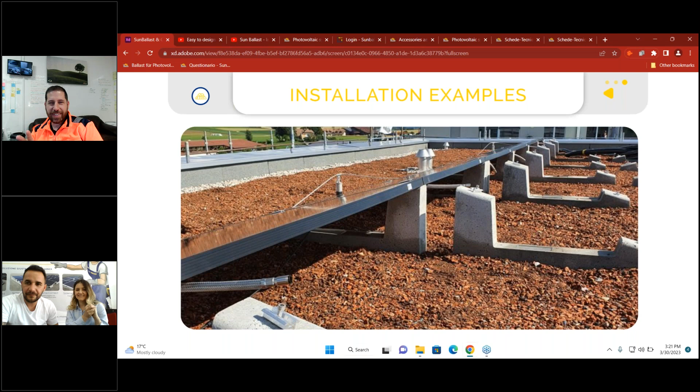or you can put the ballast on the ground. Yeah, Spiros mentioned that as well when he was doing the installation. So I think you knew that already, that you just need to adjust the ballast according to the gravel you have, right? Yeah, go on. It's really easy actually. If you find gravel, you really like it, because of the few centimeters that you want to play with, it's simply a game. It doesn't have much difference with a flat roof because it's already flat.

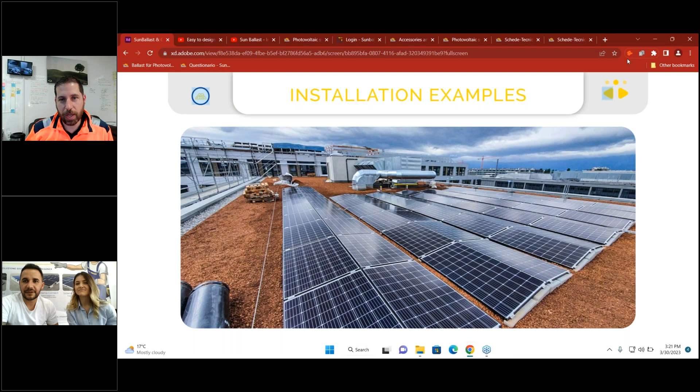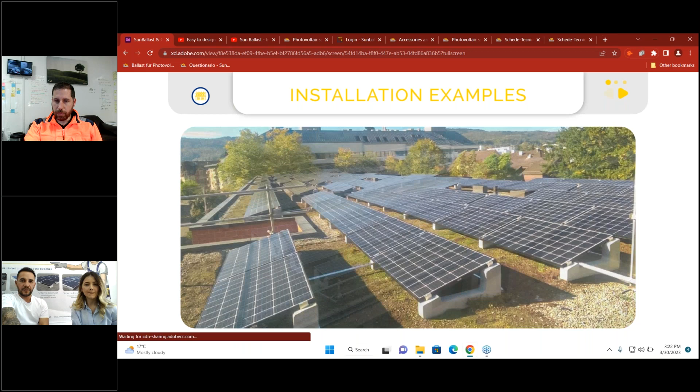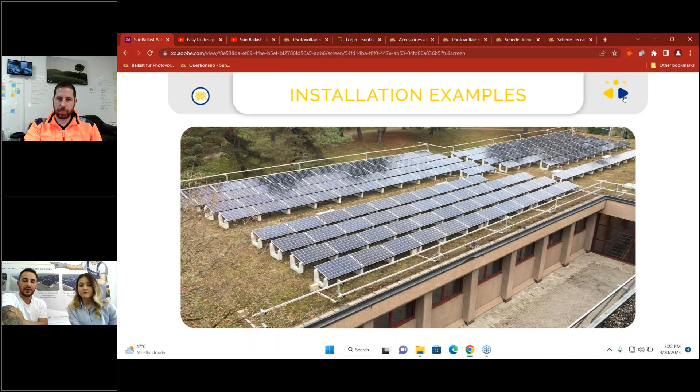And here he used a low inclination, right? You can see it. Probably the client didn't want the panels to be visible. Landscape constraints there, so they had to go with a lower inclination. That's why they used it. And the last option. Sorry? And not drilling also, that's very important in these cases especially.

And the last typology, of course, is the ground installation; we've got a lot of questions regarding it actually, right? You can implement the ballast directly on the ground. It could be soil, concrete, gravel, grass, any type of ground. Just please make sure that the ground is already fixed before doing the installation. We don't want to implement the ballast directly on the surface of the ground without fixing it before.

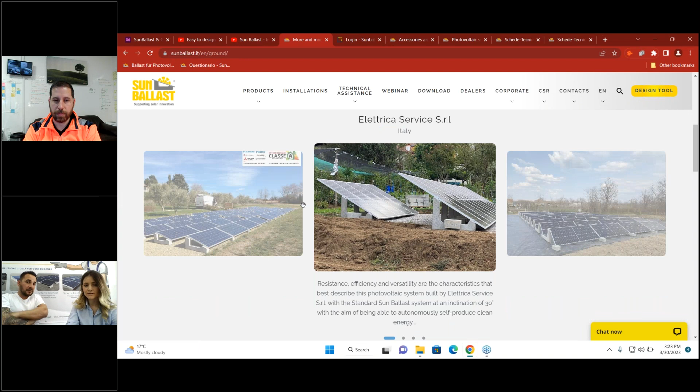Here we see some samples, right? Some of the clients decide to cover it with gravel, some of them put concrete on it. Here are some references, and some of them are even with the fabric material that Spiros mentioned before, right?

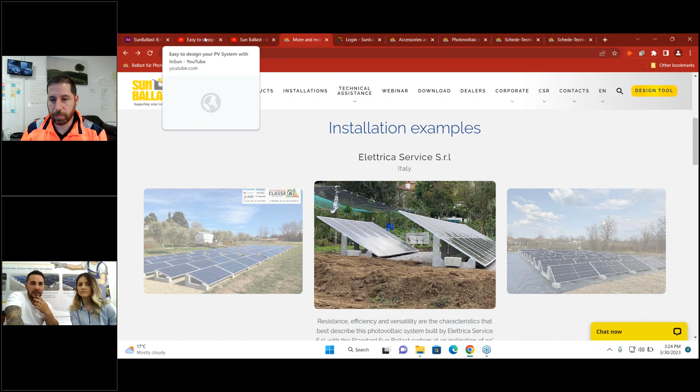So there is a fabric material that could be added right on the ground in order to avoid the grass growing, and you could implement the ballast straight away. Sure. So I guess these are all the typologies where we can implement some ballast. Of course, if you have any other type of typology where you think ballast cannot be used, please let us know, and we will definitely share our opinion on whether you can do it or not. So you just need to contact us, and we will try to find a solution.